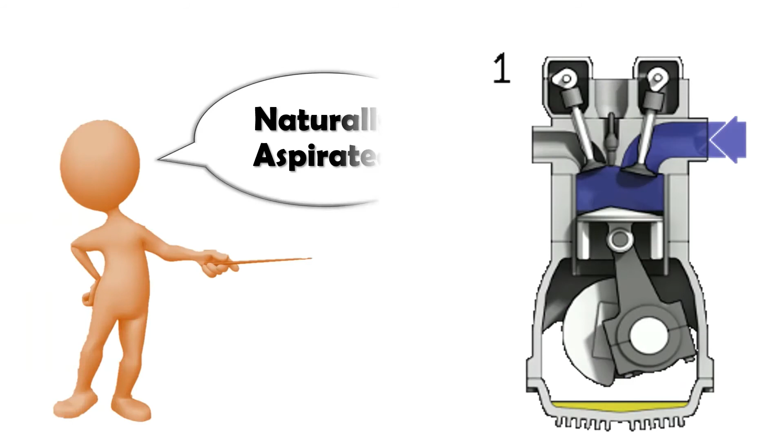A basic engine that has no additional assistance for air intake is called a naturally aspirated engine. If you have seen our earlier videos, then this is quite familiar. Hence, if you wanted more power, then you needed to go for bigger engines, like in the case of bigger SUVs or higher performance or sports vehicles.

But then, bigger engines incurred higher cost, both for production due to its size and for usage because of the more fuel it consumes. Also, burning more fuel in turn releases more emissions into the atmosphere.

So what was the alternative solution? If I needed more power, I want it at a lower cost, I don't want to pay too much for the fuel, and I love my planet. The only way possible was to maintain the power output and reduce the overall size, as smaller engines consume less fuel and is lighter by weight.

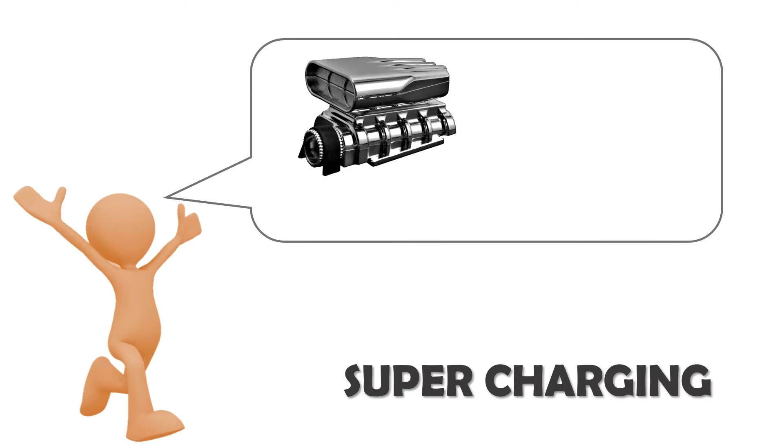In the year 1878, a Scottish engineer, Dugald Clerk, made a successful attempt of supercharging a two-stroke engine. A supercharger forces more air into the engine and hence you get a stronger boost of power.

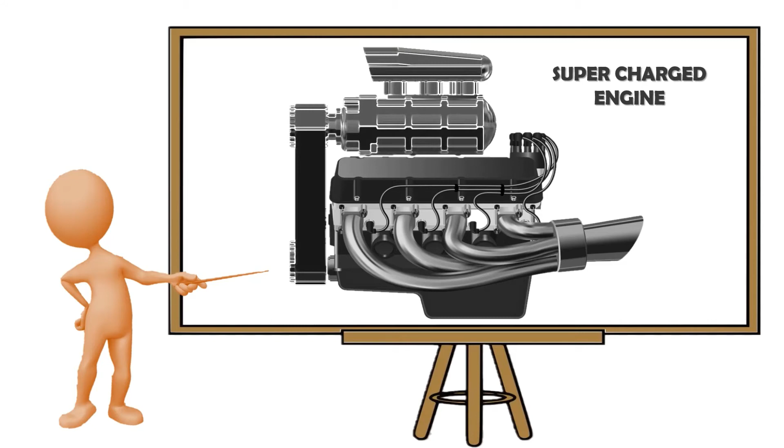A supercharged engine has a blower connected to the engine, and as the engine speed increases, the blower speed also increases, and hence more air is forced or charged into the engine, thus boosting the power of the engine.

But isn't a small part of the engine's power being consumed for supercharging the engine? Then how can we prevent this loss of power and utilize it completely for running the vehicle?

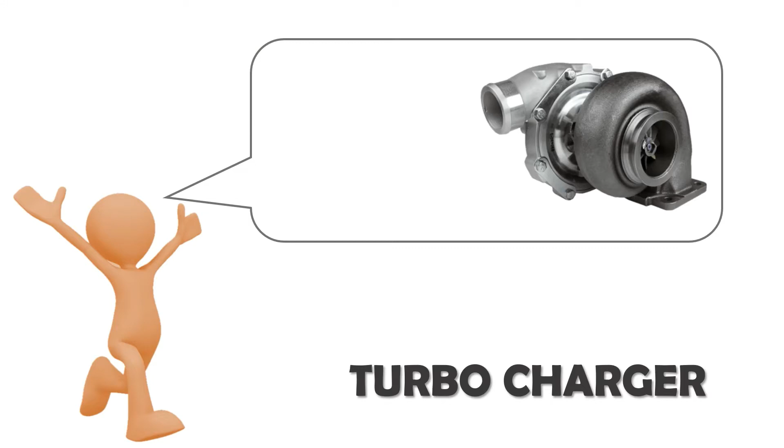In the year 1905, a Swiss engineer, Alfred Büchi, found an alternative to supercharging by utilizing the force from the exhaust instead of directly using a part of the engine's power. This is called the turbocharger or the turbo. A turbocharger is made of two sections, a turbine section coupled by a shaft to a compressor section.

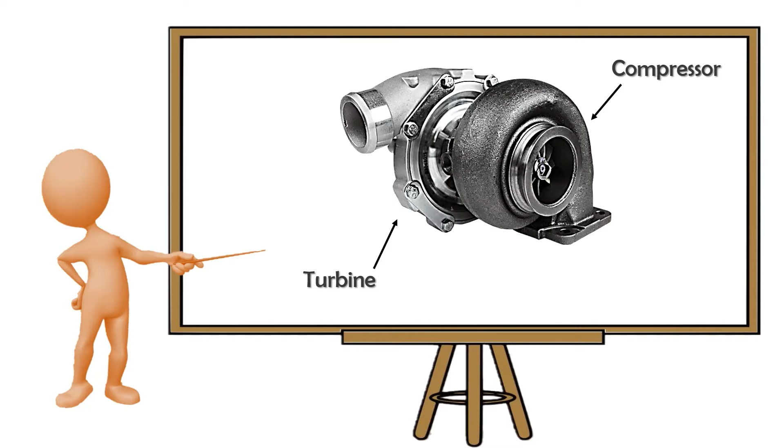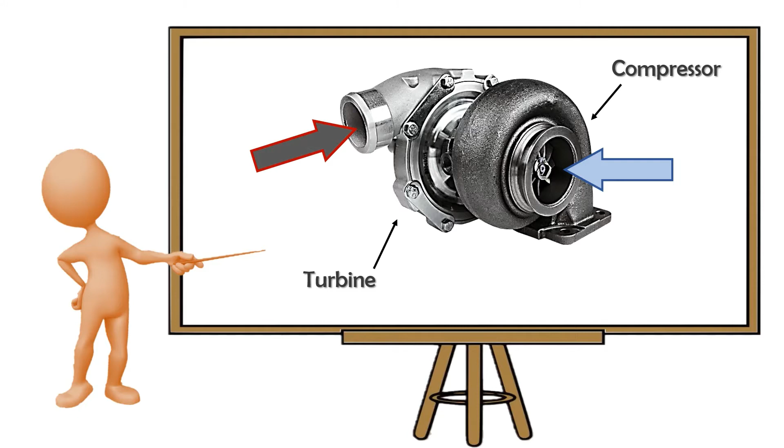The turbine is used to spin or drive the compressor with the force from the exhaust gases flowing out of the engine. This spools or spins the compressor, which pulls in the fresh air from the atmosphere and forces it into the engine at a higher pressure, which is also called boosting.

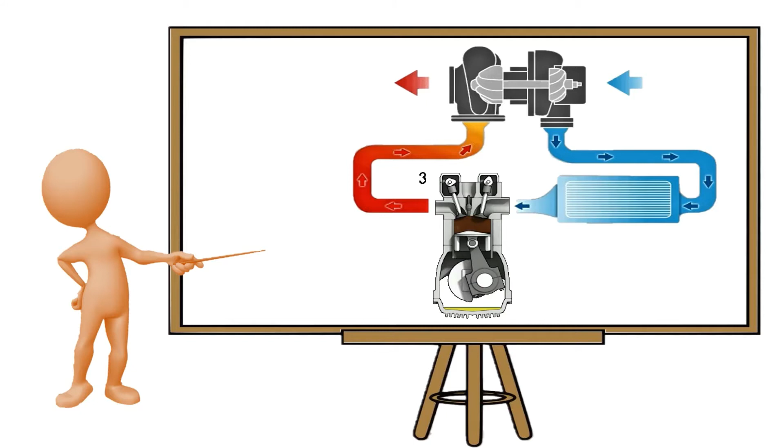The illustration shows the exact working process of a turbocharged engine. The air that is taken into the compressor from the atmosphere is compressed, which rises the temperature of the air and needs to be cooled to a lower temperature before charging it into the engine for maximizing the working efficiency.

But then still the boost happens only at much higher engine speeds. What about till then? Now, how can I get that boost at a lower engine speed, or in simple terms, reduce the lag?

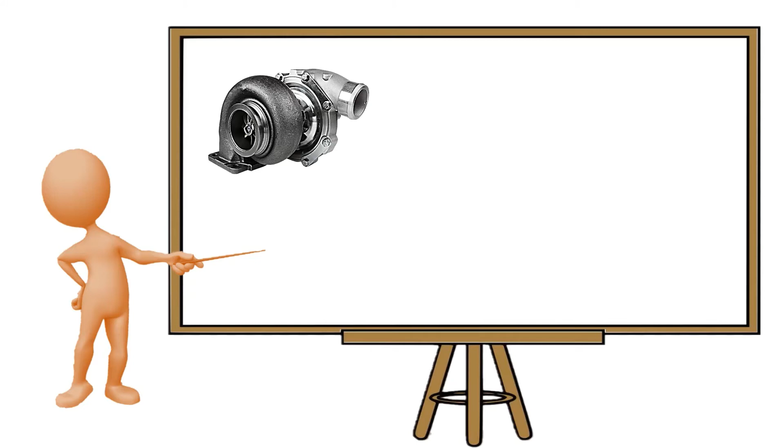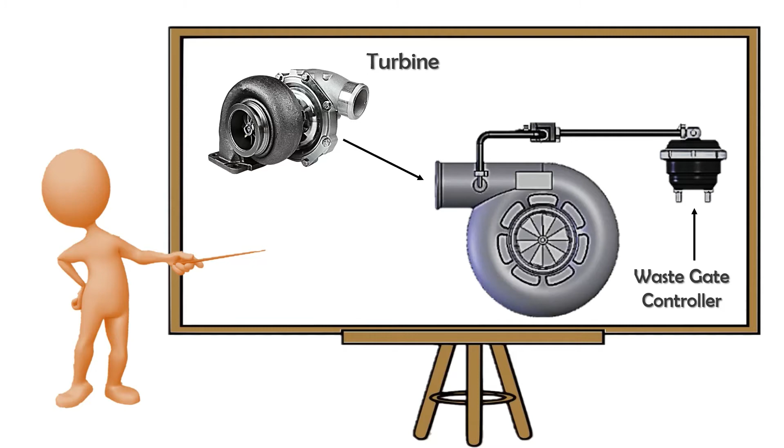The solution initially was to introduce a turbocharger that starts off boosting at a much lower engine speed range. But then, at higher engine speeds, the boost would be too high to be handled and should be controlled. A valve called the wastegate was introduced to optimize the flow of exhaust gases into the turbine and made it easier to modulate the turbine speeds, hence reducing the lag and maintaining the boost for a wider speed range.

In the year 1953, Garrett introduced the variable geometric turbocharger that worked on the principle of adjusting the effective size of the turbine, or in other words, the aspect ratio of the turbine.

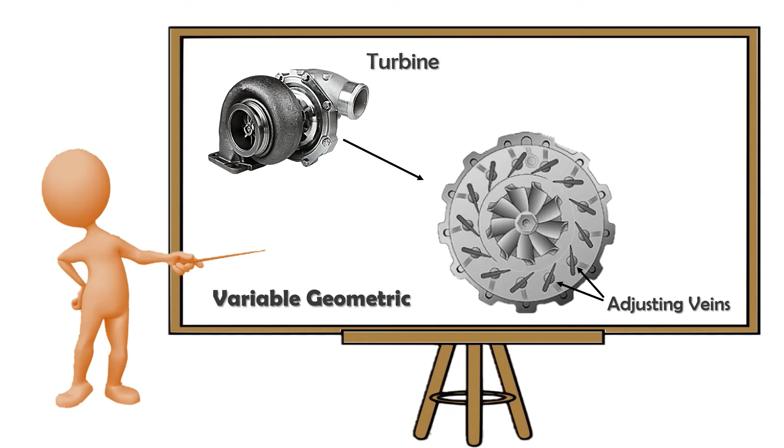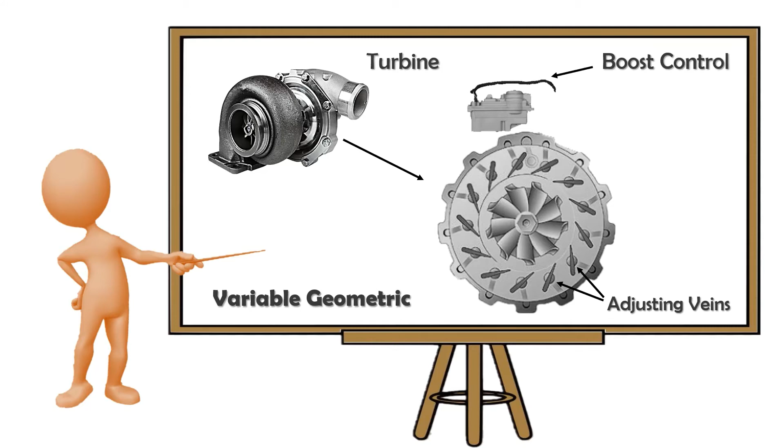The wastegate was replaced by vanes in the turbine section that can tilt their angle according to the requirement. Initially it was done mechanically, but modern VGT has an electronic boost control module to achieve this with higher precision. Hence, there is almost no lag, and the boost is available for a wider engine speed range too.

That brings us to some great achievements. The engine could be compressed down to almost 75% of the size of its naturally aspirated counterpart for the same power output, and there's a massive improvement in power and torque from the added boost, increasing performance by around 40% over an equisized naturally aspirated engine. More air being charged into the engine also helps achieve cleaner combustion.

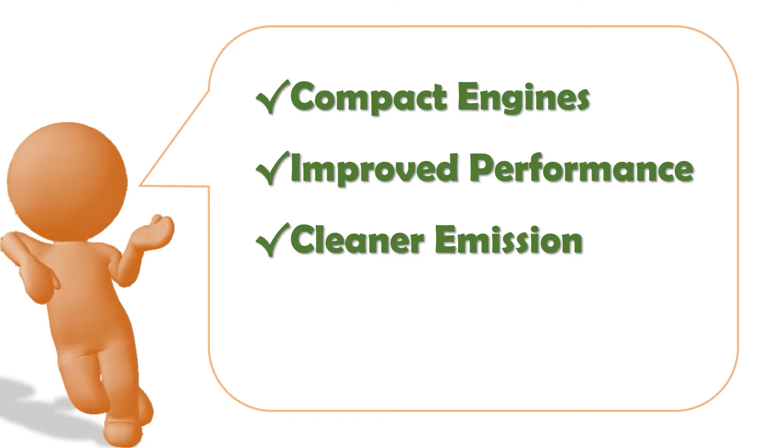Of course, it does consume more fuel as more air is being charged into the engine. But in reality, it consumes just a bit more fuel than its equisized naturally aspirated counterpart.

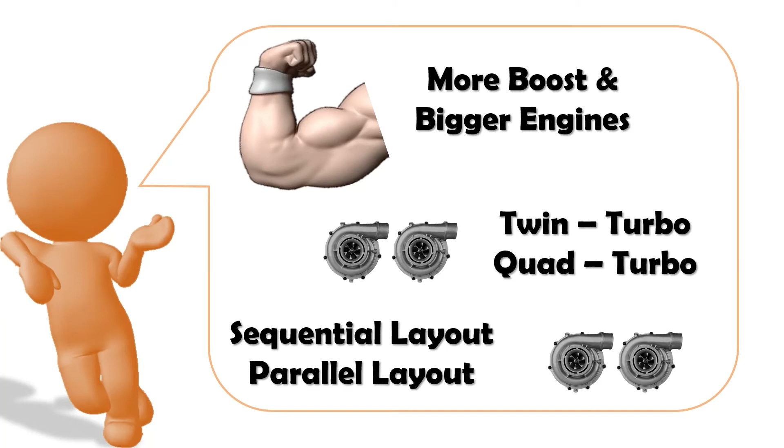Modern applications are numerous and more demanding, especially for high performance sports applications or heavier and larger applications. Therefore, we have multiple turbochargers lined up in different layouts to get the desired results. Let's have a quick glance at how more turbochargers are put together.

Here is a twin turbo setup in a sequential layout. One turbo is used to boost air into another, which further boosts the charge. This layout is done to reduce lag and enhance the boosting range. The first stage works during lower engine speeds, and as the engine speed increases and more boost is needed, the second stage provides the additional boost.

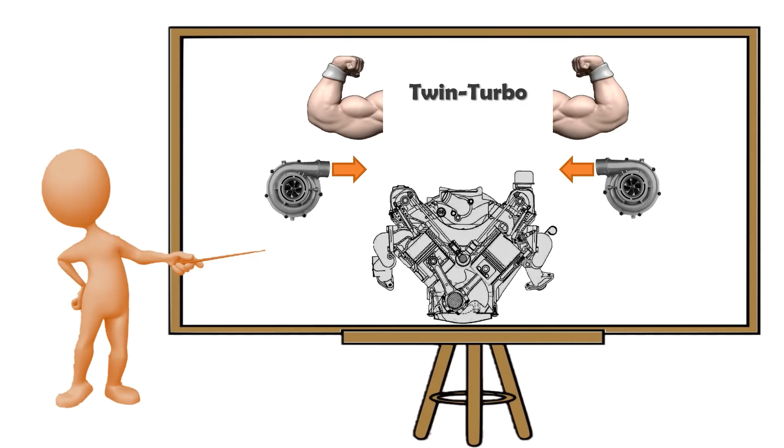A twin turbo in a parallel layout is used for engines of larger capacity. In this layout, there are two turbos charging at the same time, so there is more volume of charge coming in. Here, the priority is to provide a stronger boost, unlike the previous layout which focused on a wider boosting range.

When you look at a layout with 4 turbos charging in parallel, you are looking at a huge engine where the demand is more charge, and to provide an extremely strong boost instead of a wider working range. In short, if you are looking for a stronger boost, you need more charge, and hence the parallel layout will be better preferred.

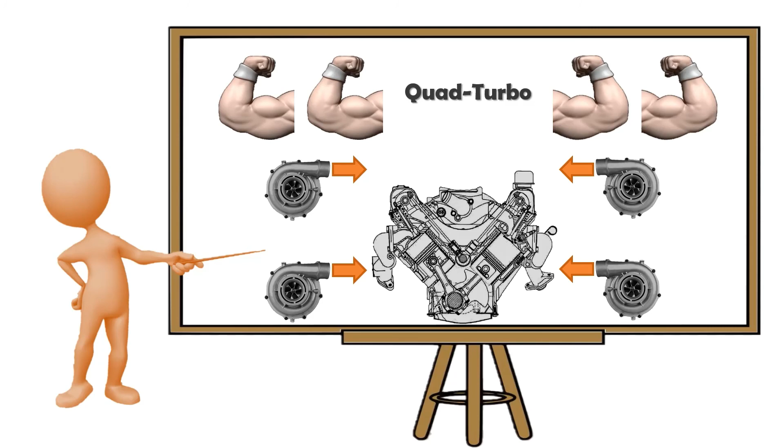On the other hand, if you need a longer range of boost, then the sequential layout will be the better way to go. Finally, the exhaust gas recirculation unit will complete today's discussion.

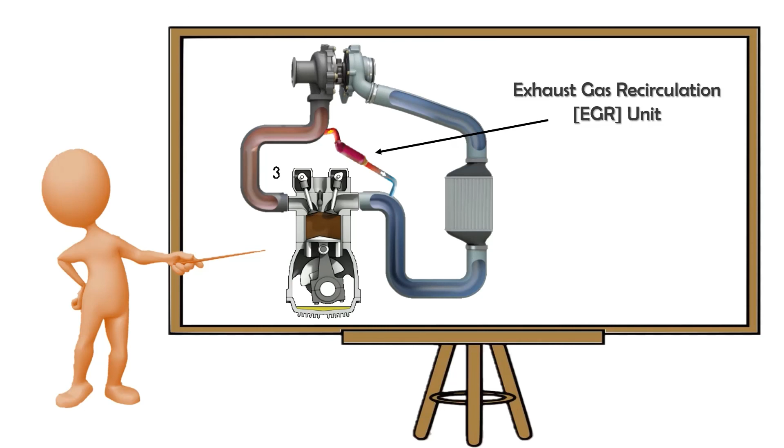A very small portion of the exhaust gas is recirculated into the engine. This helps slightly lower the combustion temperature inside the engine cylinder, reduce nitrogen oxide pollution, and improve fuel economy. When a small portion of the exhaust gas is recirculated into the engine, it displaces a bit of the fresh charge that was to be taken in, and correspondingly the fuel intake is lowered as well. This reduces the combustion temperature and reduces the excess oxygen available for nitrogen to oxidize.

Well, I hope that mess was sorted out.